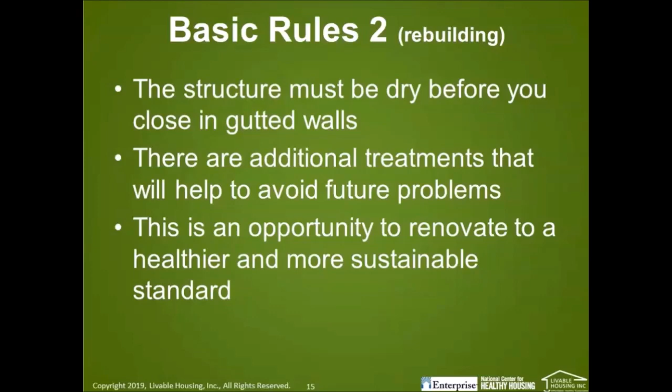Let's focus for a moment on the points in time when people could be exposed to health hazards as part of this cleanup process. First of all, when you first go back to inspect is a time when we have to be very careful. We'll talk about what precautions to take.

Disturbing anything in an environment where mold is growing really does complicate and expand the risks of mold, so it's very important that we have to be cautious about moving things around.

Certainly during the clean out of the building there are many health risks to be considered, and sadly, a lot of folks in our experience in a number of storms, beginning with Katrina, tend to return to their homes because they don't have other options, and they live in the building during cleanup and construction, and there are certainly risks there. During construction and living in the building post-construction, there are also potential risks, and we're going to go through all of these in detail.

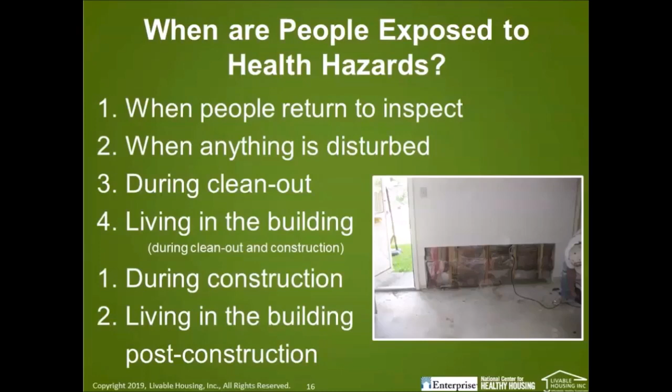Some of the hazards we're going to talk about are mold, whether it is active or inactive. There are risks involved. Bacteria, blackwater. Blackwater is a term used for stormwater with sewage in it.

Then there are standard housing hazards that may have been present previous to the storm, and they can be compounded by flooding and demolition, and those could be electrical hazards, structural hazards, and contaminants.

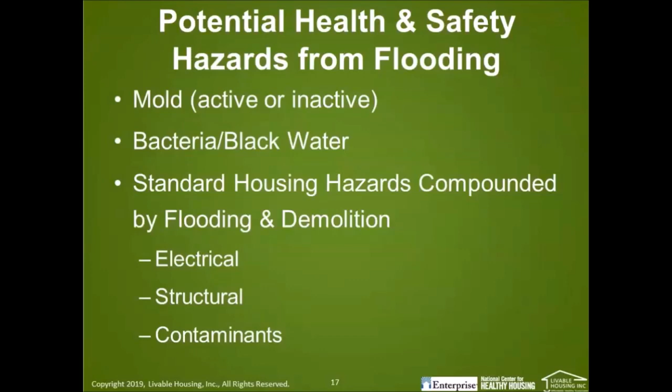We're going to talk specifically about the contaminants. Some of those include lead paint hazards, asbestos, and pests.

In terms of lead paint, moisture has the ability of making paint deteriorate dramatically and leaving behind lead paint residue. If it's lead paint, that's very dangerous. It also can expose asbestos risks in flooring and other materials.

Pests tend to nest in flooded properties. They're looking for shelter as anyone else would be, and so there's some risk there. Specifically, if in the process of the cleanup you end up doing demolition and exposing nests, in particular birds' nests, they can be very toxic and require strict adherence to personal hygiene and personal protection.

Folks, when they are doing cleanup, even when they first go back into the property to do an inspection and observe how much damage there is, really need to pay attention to personal hygiene and personal protection.

And there's always the risk of physical injury going through a building after any kind of storm. Structural, electrical, any number of hazards exist that may not have been there before.

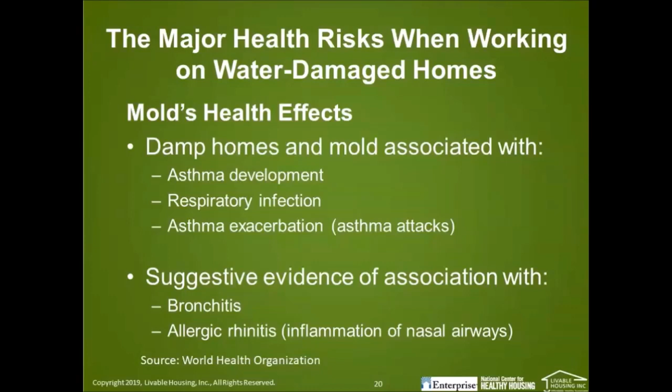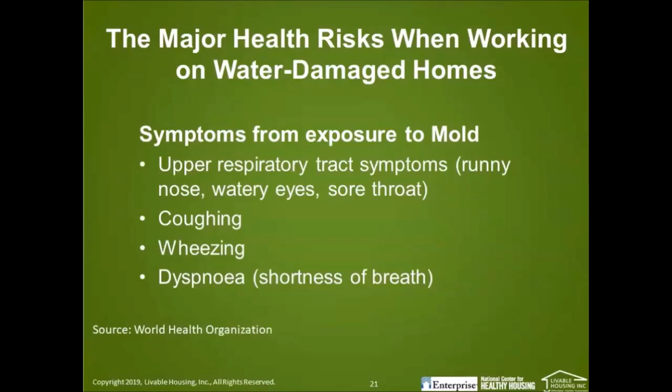We know that being exposed to mold can create all kinds of health issues, and they can develop over time with exposure. So even if you don't have health risks to start off with, you can develop sensitivities. Some symptoms you may see are upper respiratory tract symptoms: runny nose, watery eyes, sore throat. You may think this is just a cold, but you want to be very cautious and be aware of others working alongside you. Coughing, wheezing, shortness of breath—all of these can be symptoms of exposure to mold, and we shouldn't assume they're just work-related or from a common cold. So pay attention to those symptoms.

Other risks include lead dust. Lead dust is very difficult to pick out by sight—impossible, I would say. You won't see immediate symptoms typically, but symptoms can be seen, like headaches. And carbon monoxide—we want to be very careful. I mentioned generators before, but any kind of fuel burning equipment carries carbon monoxide risks with it. Car batteries, propane tanks, all kinds of things can create hazards. So those are things to pay attention to as well.

All right, so here's a little quiz. You can answer it yourself first, and then I'll tell you the answer. So, the most important factor influencing mold growth is moisture or water. I'm sure you would have guessed that.

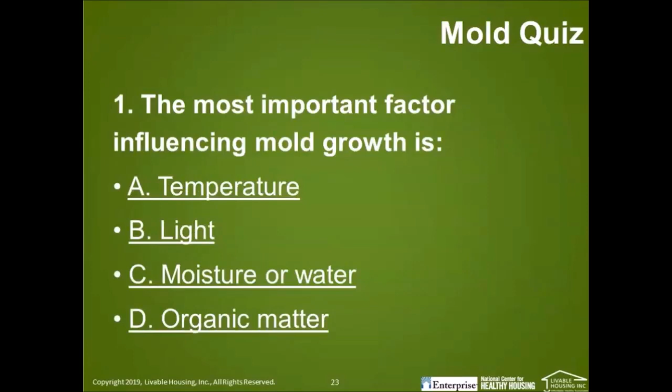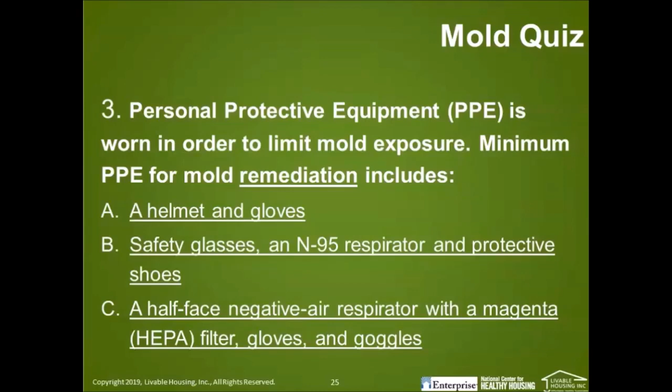Personal protective equipment, an acronym for it is PPE, is worn in order to limit mold exposure. Minimum PPE for mold remediation—and the word remediation here is important, that's doing the actual work—includes: A, a helmet and gloves; B, safety glasses, an N95 respirator and protective shoes; or C, a half-face negative air respirator with a magenta filter, gloves, and goggles. Should be no surprise we go with the most protective option, that's C, and we'll show you what all this equipment looks like in a bit.

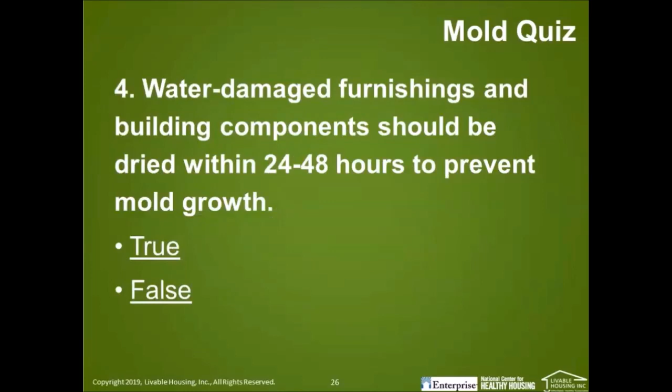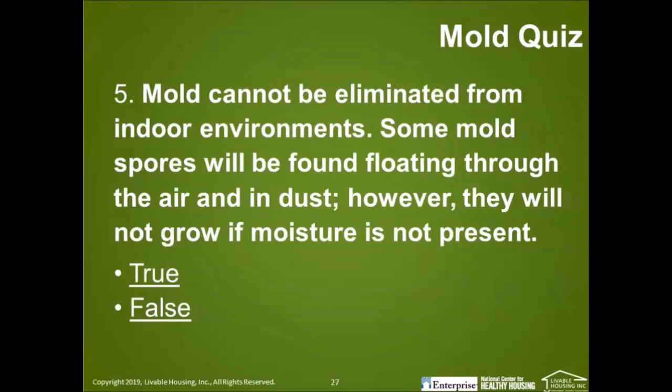Number five: mold cannot be eliminated from indoor environments. Some mold spores will be found floating around through the air and in dust. However, they will not grow if moisture is not present. True or false? And this is true. There are mold spores in every environment that we're in. So it's more of an issue of having environmental conditions where it can grow more readily and spread and create serious problems—and the health effects of mold exposure.

That was the end of the quiz. I hope everyone did well on that. I expect you did fine.

Health effects, again: allergic reactions, asthma attacks, effects from the toxins released by molds. Molds actually release toxins as they spread their spores. And the most vulnerable people, as was previously said, are young people, the elderly, people with respiratory problems, those who are immune compromised, and pregnant women. All the above are the most vulnerable portions of our population.

There are lots of different types of molds. This is Aspergillus, highly magnified. And this one even has its own website.

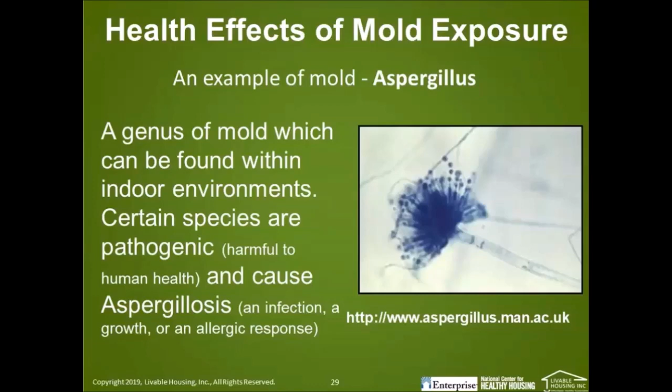There are some species much more harmful than others, and yet we don't really recommend taking the time when we have mold present to figure out which kind of mold it is. We think that all molds are generally dangerous, and we should treat them all with caution.

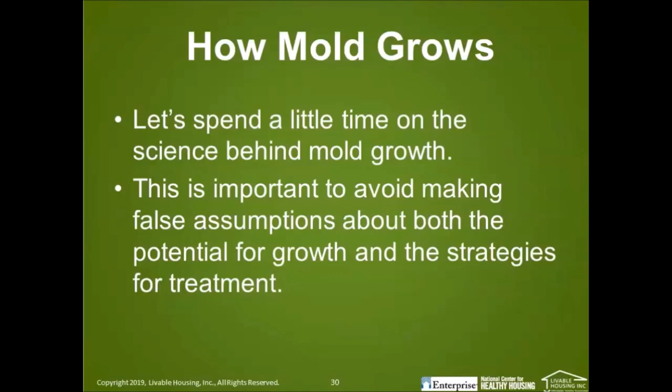Let's spend a little time on the science behind mold growth. This is important because we don't want to make false assumptions about the strategies for dealing with mold, the potential for growth, and the strategies for treatment. This is from an ASHRAE guide on mold. Mold spores have enzymes on their surface, and they break down damp organic matter as a food source. So any kind of organic matter can be a food source for mold.

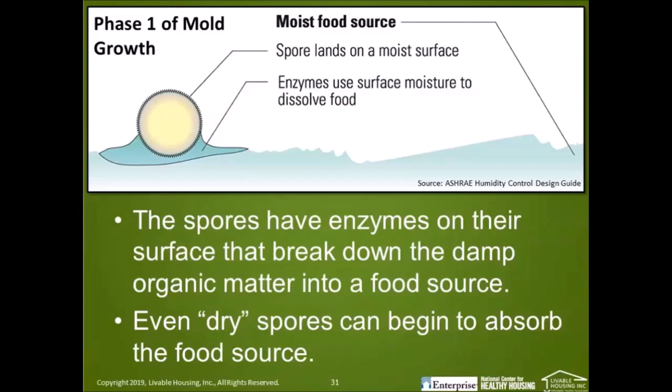Even dry spores, spores that have dried out in a dry environment, can begin to absorb the food source and, in a sense, rejuvenate themselves. As they begin to grow, they start producing filaments called hyphae that grow into the food source, allowing the spores to germinate. The hyphae also have enzymes that dissolve and absorb the food. This all tends to accelerate the process of mold growth. It's very microscopic, but this is what they're doing - it's a plant of sorts that is rooting on an organic material.

In phase 3 of the process, the hyphae start to grow more thickly. They grow deeply into the surface of the organic material, and they begin to form a protective mat that gives them a little protection from the environment. It also helps keep the surface moist so they can continue to feed, and they begin to even generate their own water, which helps digest more food.

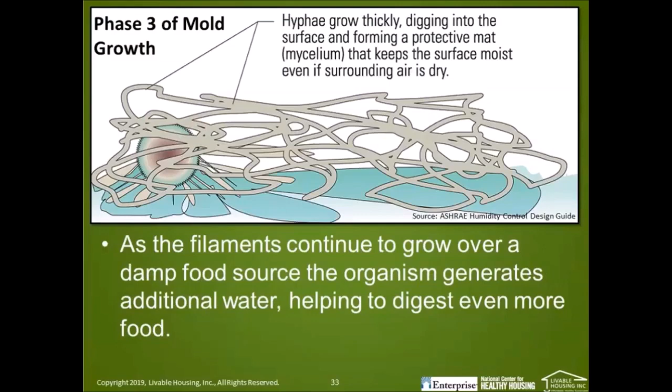Fascinating creatures. In phase 4, the mold grows spores and releases these spores into the air. When the food source runs out or the moisture goes away, mold growth slows or stops, but the spores are their way of reproducing, and then that begins the process over again.

Hope that's helpful. There are a couple other things to keep in mind - some technical terms here. Mycelium is the mass of mold. Mold spores can remain dormant for long periods of time until growing conditions are favorable. Fragments of mold, including the hyphae, can also be transplanted to grow new colonies. And it's the moisture on the surface of the food source that really gets things started.

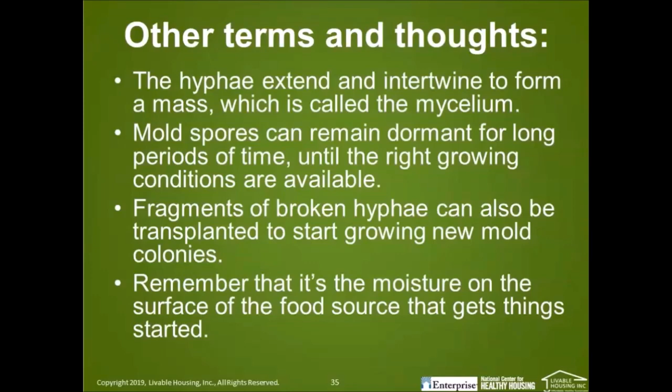What's interesting here is that dirt is even a food source. So even if a surface material is not organic, there could be dirt on it that would be sufficient as a food source for mold to grow.

So, Jonathan - Jonathan Wilson's going to take over and talk a little bit about his experience in New Orleans post-Katrina, and this is particularly important because it'll give you very good information about the risks of mold exposure during the cleanout process.

Thanks, Armand. I think that we have a benefit with mold in that there is a huge ew factor. That's important, because some of the contaminants we deal with, we can't smell them, we can't see them - something like radon, we tend to ignore it as a risk. When you go into a home that's been flooded and you see mold growing up the wall and you can smell it, there's a general sense that something is wrong here, and we need to be really cautious. That is a good thing.

That's really important for us to make sure people recognize they have to wear that protective gear Armand was talking about, and we'll talk further about what you should be doing to keep yourself safe. But even with that ooh factor, we sometimes overlook how serious this can be, and we'll say, oh, I can just run in for a couple minutes and I'll be fine. I don't need to put on this mask, or this suit that's warm or hot - I can do this safely, and it's not a big deal.

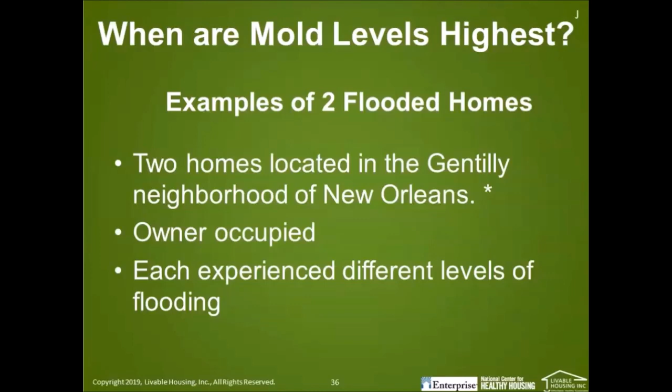The first is a two-story home. It was built relatively new - only about 20 years old when Katrina hit. Slab-on-grade construction, and this was the one that was raised a little bit.

So it had about 2 to 3 feet of mold growth on the first floor. It had only about a foot of water on that first floor that generated that 2 to 3 feet of mold. The second home was in a lower part of the neighborhood, a 1-story home. It was older, built on piers, and it had at least 5 feet of flooding, and the mold growth, when we got into this property, was all over the ceiling.

It was all over everything. It was a place that you had to have full protective gear just to feel like you could breathe safely in this property.

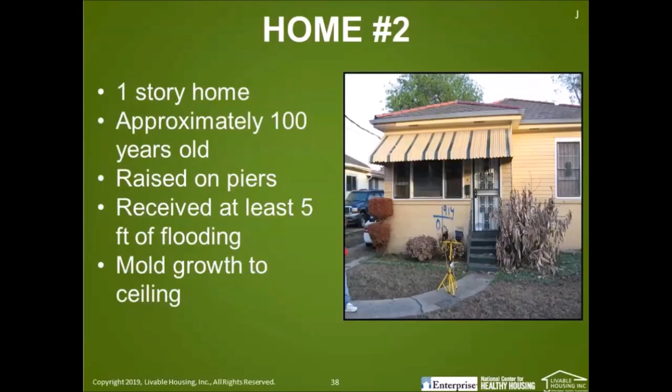So what did our mold sampling results tell us? So if the part of our brain that has the ooh factor is telling us this is a problem, looking at these results really sets it forth.

So what do we know about colony-forming units? Number one, nobody has created a health standard for this. So you can't go to the CDC or the World Health Organization and find out what is a safe level of mold that I should be in. That has not been created.

But we have some averages. The average for an interior property is less than 1,000 colony-forming units per cubic meter. On the outside, in a community like New Orleans that tends to be humid and tends to have a lot of vegetative growth around there, it tends to be in the 5,000 to 10,000 range on the outside during the warm, humid season. So that's giving you a baseline on what people are normally exposed to.

So here we have a living room where you'd normally expect it to be less than 1,000, and we're over 1 million colony-forming units during the possession removal process when we're pulling stuff out of the property. After we've allowed it to settle down and people haven't been in that property, it's dropped down to 35,000, but it's still way above what we normally expect.

And then when we were doing demolition, so we've gotten all those possessions that have been sopped with water and have mold all over the unit, they're out of there, but we still have mold on plaster, on some places where we had drywall, and the wood studs behind the walls are still coated with mold. During that process of pulling out the broken plaster, the lath, and cleaning up, we're at almost 600,000.

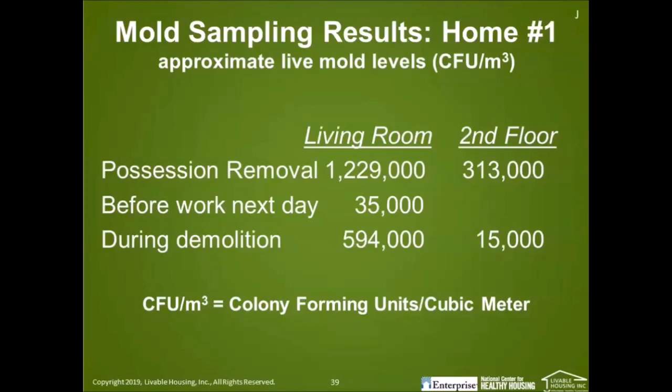Looking at that second house, this is the one that had mold up to the ceiling. When nobody's been in it, and again there's been no disturbance, we're seeing levels that are well above. The first time when it's been closed up, it's higher. When we've been able to open up the windows and allow for a little bit of movement, it's a little bit drier in there. We're seeing lower levels, but levels that are still well above 10,000 on the inside.

And then it jumps off the roof when we start doing demolition. Well over 6 million colony-forming units per cubic meter in that living area.

And this is where, while we're pulling stuff out to the street, we'd be expecting to see maybe 10,000 to 15,000 on the outside of the property. But while we're doing this, moving all this debris to the outside and creating piles, and there's piles at the neighboring houses, we're seeing over 30,000 colony-forming units just on the outside of the property where you'd think it would be relatively safe. So we're creating an unsafe space inside the house that's magnitudes above where we'd expect it to be, and even on the outside we've got real problems.

So when you're doing this, you need to be wearing your protective gear. It's clearly needed on the inside, but also on the outside, because we may be creating a real hazard, both interior and exterior. So hopefully this gets beyond that ew factor, that there's numbers behind it to say we need to be really safe, that we need to be wearing our protective gear when we're doing this work.

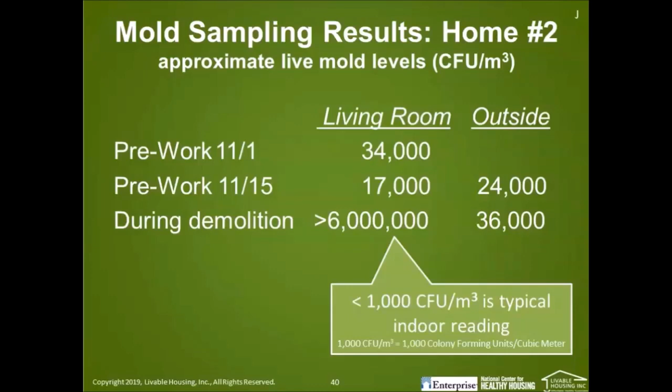So let's talk a little bit about the concepts of personal hygiene here. It's really important to be able to wash your hands when you take breaks. You want to make sure you have clean break areas. Protective clothing can spread all of the bad stuff that you run into in a home that's been flooded, or a home that has mold growth or other contaminants. And so a lot of people will not pay sufficient attention to that.

I'm going to now go through and talk a bit about the information out of the field guide that the National Center created. You can easily find that on the National Center's website, and it will have links also in the resources end of this presentation that you'll be able to get via download.

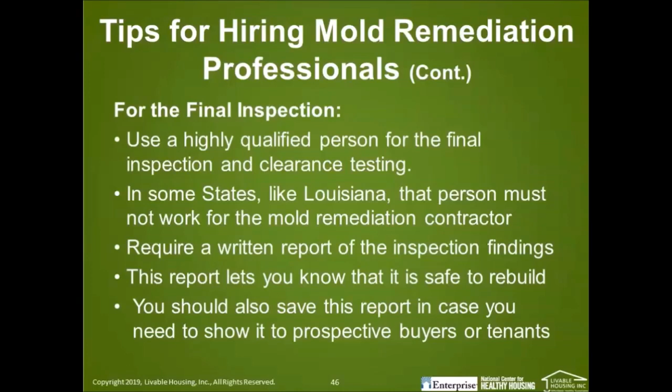There are 2 agencies that do certify mold professionals, and again, this will be on the PDF file of the slides so you can get access to these websites and the names of these agencies later.

There are other professionals that you may need if there's asbestos in the property - again, an incredibly high-risk contaminant. And in some states, there are contractors who apply borate solutions. In some states you need to be a licensed pest control operator to apply some of the solutions we're going to talk about, even some of the more benign ones, but we'll talk more about them in a bit.

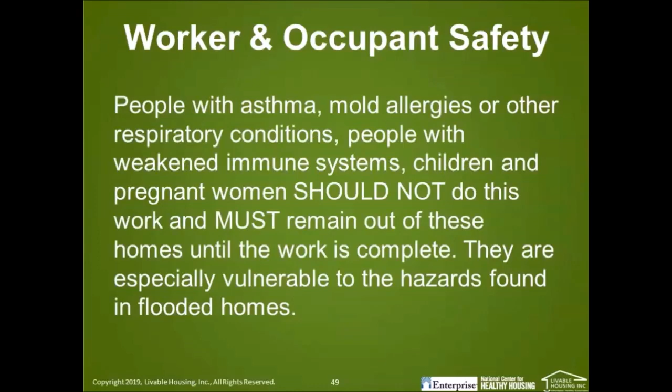And when it comes to worker and occupant safety, we're harping on this, but it's crucial. People with asthma, mold allergies, or other respiratory conditions, people with weakened immune systems, children and pregnant women should not do this kind of work and really should be out of these homes until work is complete. So, word of caution: we definitely want folks to wear a respirator.

Respirator use is extremely important, and we'll reiterate that again. But not everybody's respiratory system is up to the task of doing this kind of work, or even wearing a respirator. If you know you have respiratory issues, you should get your doctor to tell you it's okay. It is really best to have a respirator fitted to you to make sure it will do its job properly. OSHA regulations require this for contractors, and it's good guidance for anyone doing this kind of work.

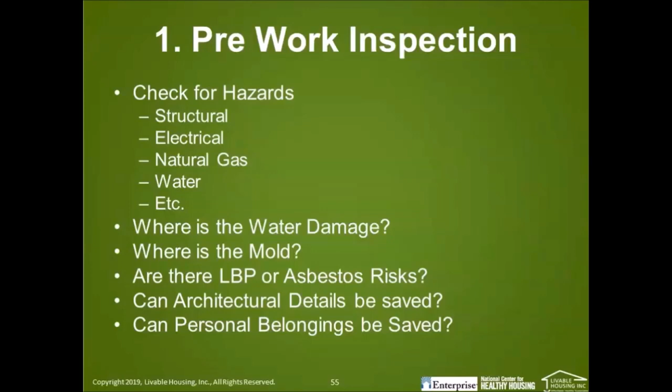Start thinking about things you think you can save and detail them - maybe architectural details worth saving, or materials that are salvageable. Some wood details can be saved; typically drywall and fibrous materials are not. Are there personal belongings you may be able to save? This is all part of the pre-work inspection - starting to document and categorize things you're going to try to save or dispose of.

And before work begins, you want to make sure you've got supplies and a plan ahead for trash removal. Oftentimes debris can be stored at the curb.

We recommend putting signage up to let people know that there's hazards there. The last thing we want is for debris at the curb to be a hazard for children in the neighborhood. You want to set up a separate storage area for items that you're going to save. You want to get them out of the work area so they don't become any more contaminated.

If you need temporary electricity, you need to set that up at this stage. If you're going to have tools on site, you may want to set up secure storage for them. Certainly turn off gas and electric services if there's still risks. And then there's the issue of bathroom access. If you don't think of that at first, at some point that'll occur to you. But these are all things to think about ahead of time. You don't want to start work without having thought about them.

We're going to talk here for a minute about basements. In Katrina, there were no basements to deal with. Certainly post-Sandy, we dealt with many basements in New Jersey and New York, so it's a mix of situations. But basements present some very unique issues and risks.

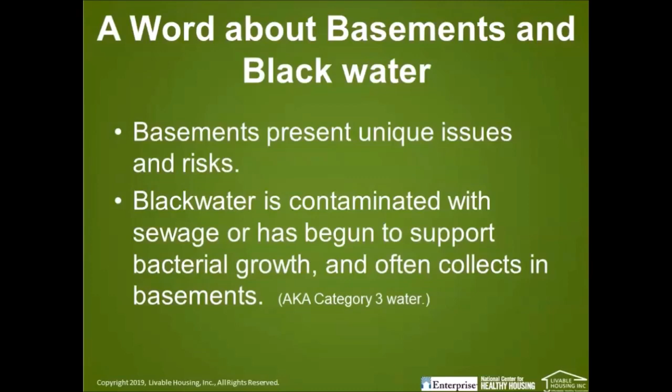When we're dealing with Blackwater, and especially water in basements, you're going to need waders of some sort and respiratory protection. You don't want to be wading in this water and allowing the water to get to your skin.

Pumping out basements is sometimes necessary, and the gas that's in Blackwater, the sewage that's in Blackwater, produces methane gas, which is an extreme hazard. So we want to get the water out. We have to be very careful when we're doing that, and eventually when we get the water level down, there's going to be solid debris remaining that we're going to need to shovel out.

Blackwater in basements, we're going to talk in more detail about cleanup, but in basements this involves scrubbing down walls, and if you have working floor drains, that's great. You may not. This is a soap and water process at first, and we'll talk more about other treatments. Laundry or dishwashing detergent actually works great, and mild bleach solutions can be an option here as well. But we don't wholesale recommend bleach because it is not as effective as some people give it credit for, and it also presents other hazards and damages materials. Soap and water is an excellent cleaning medium, and that's what we recommend.

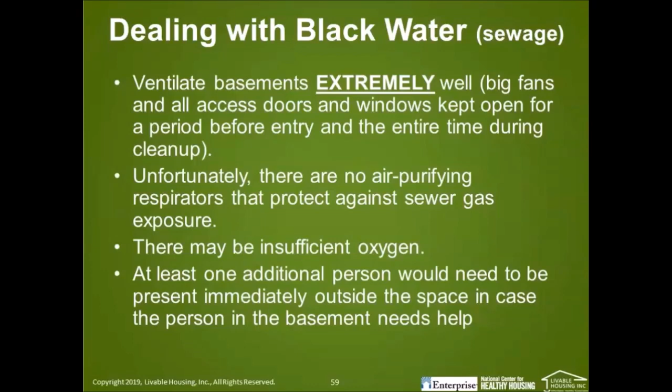So we always really strongly recommend that this is not a task for an individual to take on. You need multiple people on site, some of which are just watching out for the person that's in the basement. Serious risks here to be dealt with.

Typically in rain situations, having good stormwater management minimizes the saturation level of the ground and doesn't really affect the water table. But in a flooded situation where the water level has risen partway up the basement or even past it into the first floor, the water table could be saturated all around the building, and removing basement floodwater too quickly can create an amazing hazard, in that the pressure of the water in the water table can actually push in the basement foundation walls.

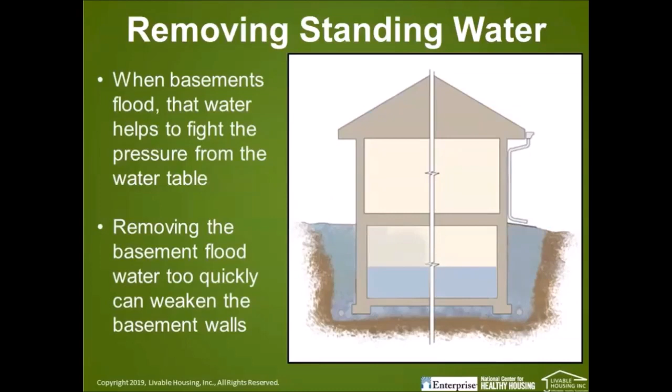So FEMA has excellent recommendations about this. We need to be very cautious and strategic about removing water out of basements. FEMA's recommendations say when flood waters have receded such that they're no longer covering the ground outside, pump 2 to 3 feet of water out of the basement, mark where the water level is, and wait overnight. Then check the water level the next day. If the water level went back up, it means that the water table is still very high and water is still seeping into the basement, and it's too early to completely drain the basement.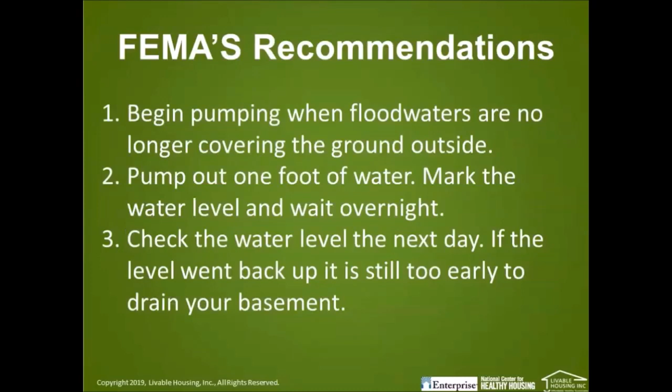If you've done that and the water level has gone back up, wait 24 hours, pump the water down a foot again, then check and repeat until the water in the basement stops returning to your mark. At that point, pump out 2 or 3 feet and wait overnight to see what happens. Just follow that protocol.

Be very cautious about trying to pump all the water out of the basement at once, because the last thing you want is to have basement walls collapse or create structural problems that are going to make the repair very, very expensive, if possible at all.

We talk about this at this stage because we need you to be thinking about removal of standing water in the basement as you're strategizing about the rest of the work. You may be able to do some clean out before completely pumping out the basement, if the building is structurally okay.

There is a website where FEMA goes into great detail about this, and again, you'll have this in your copy of the slides. All right, so now let's get back to the process.

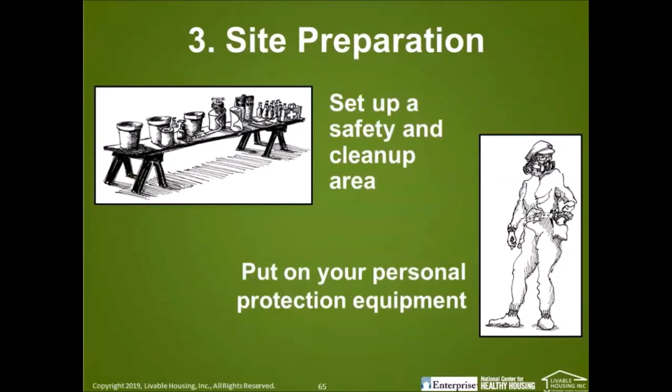Site preparation involves setting up a safety and cleanup area and also personal protective equipment. One of the things we strongly believe in is separating the work areas, those affected by flooding, from those that have not been.

For instance, if the basement was flooded but the first floor wasn't, having clear separation between those areas is important. Similarly, if the first floor was flooded and there's a second floor, you would want to seal off the second floor from the first floor to minimize the spread of contaminants.

There are things like plastic sheeted doorway coverings you can create. In this case, there's a sheet of plastic with a slit and a flap over top of it to protect the opening, so that as you go from clean areas to work areas, you're spreading fewer contaminants.

We always say set up a things-to-be-saved table outside the work area, or an area to save things, and consider putting plywood down or some kind of sheet material to walk on as you're removing furniture, cabinetry, and upholstered items out of the building.

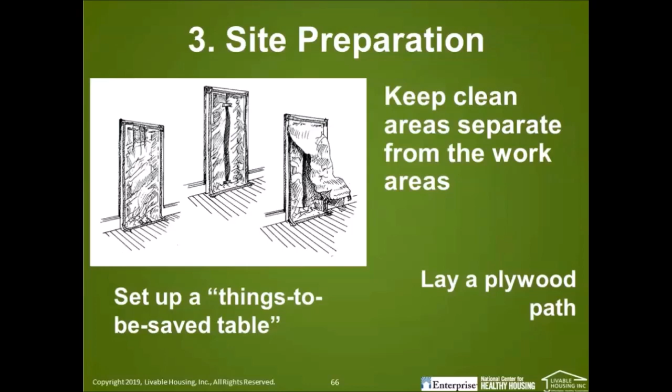Going over soggy carpeting can be very hazardous. Think about the surfaces you're walking on.

We also want you to think very much about ventilation. It's always important to try to dry out the building immediately, but we don't want to create a ventilation strategy that spreads contaminants from the work area into areas that weren't heavily affected. Sealing off those areas and ventilating the work area properly is key.

Here's a strategy where the first floor was affected, so there's a window fan ventilating the first floor. You might think putting a fan up on the second floor would make sense, but no, we would strongly recommend sealing off the connection between the floors and ventilating directly from the work area.

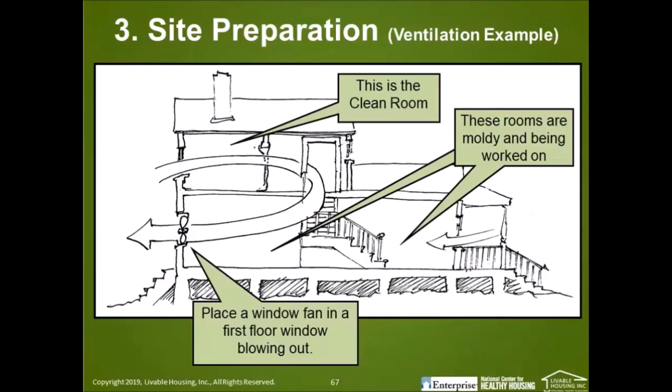So during the clean out, we're going to ventilate. Now we're at the clean out stage, we're actually starting to work. We want to ventilate as much as we can, remove small furniture and objects on the floor first to create clear pathways, then move on to removing large furniture, followed by appliances like refrigerators and stoves that have been affected.

Cut and remove wall-to-wall carpeting, cutting it into manageable sections rather than dragging out a big piece. Cut strips, roll them up, bag them, and take them out to the curb. Clean out all your closets, shelves, storage areas, and kitchen cabinets. We need to get into every nook and cranny in the work area to expose all the potential areas where mold could be growing or where contaminants may have spread.

It's very important to be methodical here, going in this pattern of starting with small stuff, large stuff, appliances, flooring is the safest way to go.

There are some historic details you may want to save that may be higher quality. Saving those is good. If you can get them out at this stage and store them someplace safe, that would be great. But it's often much less expensive to dispose of building components that are moldy, and certainly any drywall, plaster materials, carpeting that's become moldy, that stuff needs to go. There is a section about selective tear out in this clean out guide called Section 7, which is worth taking a look at. But if we're gutting and tearing out materials, we want to be thinking about what can we save, what do we need to store, and what is just going to be debris.

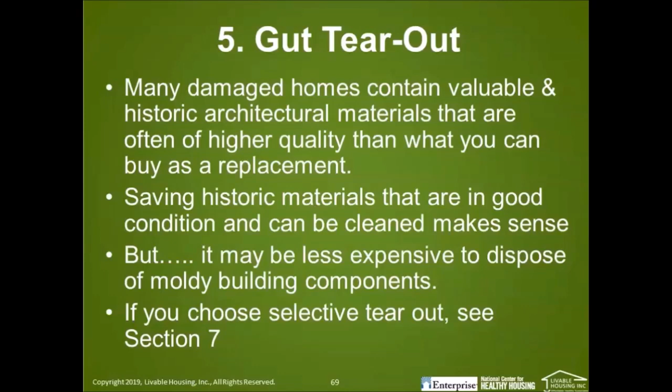Any cabinets, shelves, doors, trim that has been damaged beyond repair, this is the time to remove them during the process, and then tearing down drywall or plaster ceilings that have been affected, removing drywall and plaster from the walls would be the next steps. You'll notice that we have the ceilings first before the walls. The idea here is we're working from the top down.

You'll notice in this illustration, this person is working from a ladder. It's very important, if you're on a ladder, not to be pulling materials onto you. So this is a stage when you're first getting started. It's difficult to do, but you need to be cautious that you're not going to pull a ceiling down on top of you as you go.

So you'll see they've started cleaning out an area, and now they're using pry bars or tools to lever off other materials. It's extremely important, if you're going to create debris from a process like this, to create a pile, move it out, and then move on. Do not do the entire ceiling in a room and then try to remove the debris. It's way too dangerous. Work in stages. That also gives you a little break to be outside.

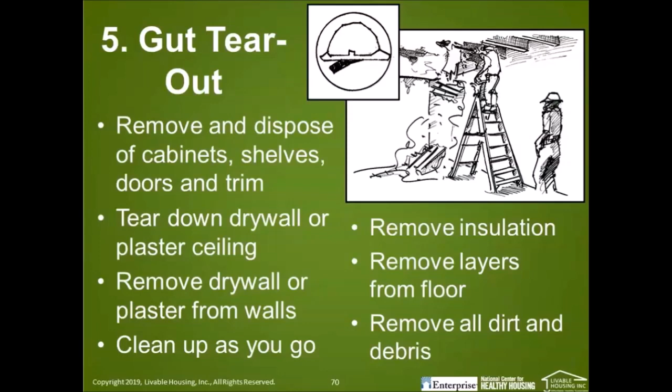So let's say we are now at the stage where we've cleaned out all the materials that have been affected. I will say at this point there are some folks that suggest that you can get away at times by removing only the bottom 4 feet of a wall covering. That may or may not be true. We have seen plenty of situations where people have done that, left the upper portion of the wall intact, and had mold grow inside that wall cavity above there.

You'll see in this illustration the entire wall has been gutted. It does make it a lot easier to clean, and it is a better way of ensuring that you're addressing all the potential mold growth and contamination. It's something to consider. I think sometimes it's penny wise and pound foolish to go part way up the wall, although some insurance companies will suggest that. I don't think it's that much more expensive to do the whole wall.

In any case, when we're done gutting, then we want to go to this phase where we're doing pre-construction and cleaning. This phase is very important because this is where our work will help to ensure that we're not creating an unhealthy situation in the long term.

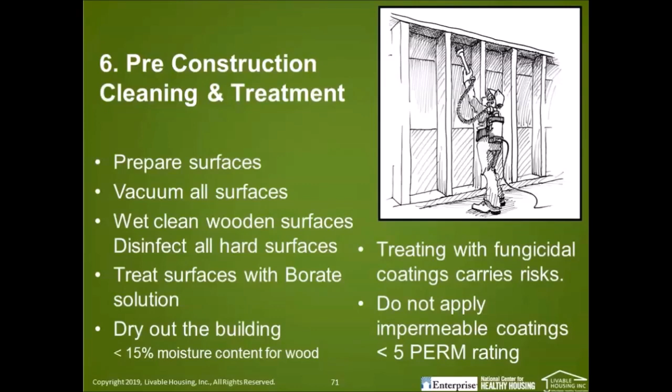Sometimes during this pre-construction cleaning and treatment time, we may need to run dehumidifiers in hot, humid climates. Commercial dehumidifiers and other restoration industry equipment can speed this up. There are also air scrubbers that help create more circulation of air. If commercial equipment is not an option, Louisiana State University, who has great resources about this, recommends combining running of air conditioning and electric heat at the same time to help dehumidify and clear out the air. Their website has some great detail about this methodology. We're going to give you a resource connection to that as well.

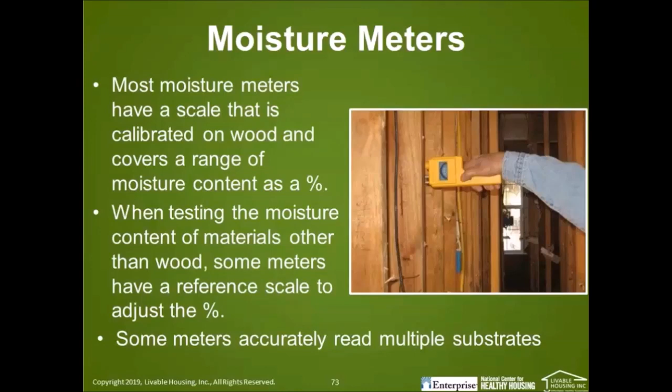This is an illustration of a moisture meter, and we think these are really important to use to make sure that all the wooden materials exposed after a flood dry to less than 15% moisture content before we re-drywall, before we close in these walls. These don't have to be terribly expensive things, but as you can imagine, if you close in a wall prematurely, you can create all kinds of problems with mold growth behind the new clean, shiny drywall finish.

A word about HEPA vacuums. They could be expensive. You could try to rent a HEPA vacuum for the vacuuming portion of the cleanup process. Some of the shop vac style wet dry vacs have accessory HEPA filters. They're not truly HEPA filters, but that might be some sort of compromise. In any case, being cautious about this is very important.

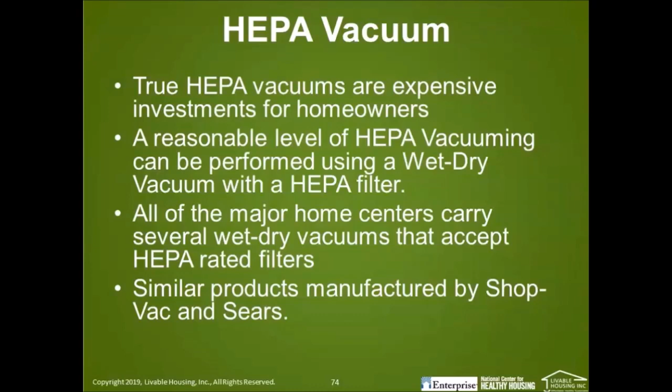Let's talk about wet cleaning. Again, we don't really recommend bleach except for hard surfaces, as I mentioned before. A non-phosphate detergent - the Center for Disease Control recommends using laundry detergent or dishwashing detergent. And this 1 cup of household bleach per 1 gallon of water is important to remember for those hard surfaces. You don't need anything stronger than that. You should not use straight household bleach. Household bleach is sufficient - you don't need to have a concentration greater than 1 cup of household bleach with a gallon of water.

If you're mopping and cleaning, we strongly suggest using a multiple bucket system where you have a constant clean rinse water bucket to rinse out your mop and then wring it out before you use it again. So having separate buckets for soapy water, clean rinse water that you change regularly, and then a third bucket with a wringer to wring out the mop is the best way to go. If you don't have the 3-bucket system, you just end up spreading contaminated water around - that's not what you want to do. The idea is: use soapy water on the mop, mop up an area, rinse it out in clean water, wring it out in the wringer bucket, and then go back to the soapy water and mop again. And that means you have to change the water in the rinse bucket very regularly. Very important methodology.

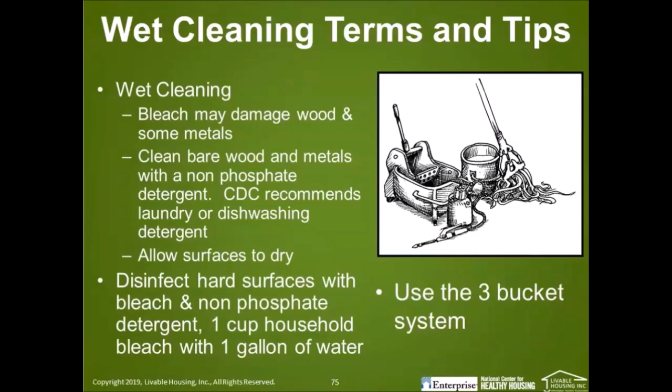So with that, those are the really key steps. When we talk about the chemicals we're using in our homes, we need to recognize that many of them, especially the disinfectants we're using, are regulated chemicals under the EPA. That's meant to protect us from many bad things in our environment. So recognize that this is both something to look out for, but also something that you can use to protect yourself.

Somebody may be selling you something that says, oh, this will take care of your mold. Well, if they're selling it to you as a cleaner, it's not going to be covered by EPA. But if it's being sold to you as a disinfectant, then you should be able to see a label that says it's EPA certified as a disinfectant. It's important to look for that.

In addition, you want to make sure you're reading the safety data sheets that are required whenever there's a regulated chemical, so you know what you're using. Again, be careful that if it does have bleach in it, you're not mixing it with something else—there may be other chemicals there, so it's useful to see what reactions may come from it. We've already been discouraging people with respiratory issues from doing this work, but especially if you see that a chemical has a high respiratory toxic level, you want to be especially careful about those chemicals.

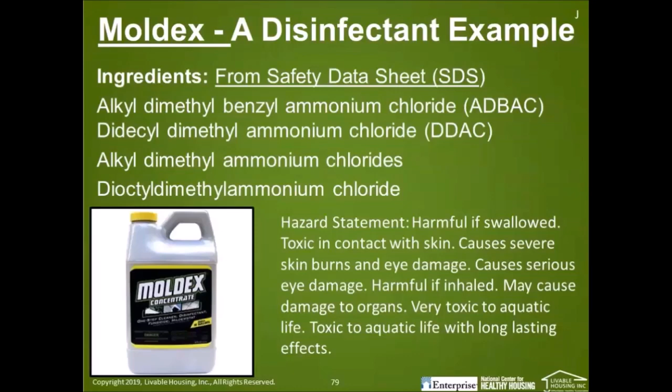it means be careful. And once you get past that clean and disinfect stage, there are some optional extra things that we think can be useful. This step is definitely something we put as a higher priority option that you should think about. So once you've cleaned and disinfected, there is still a risk that if it's not totally dry when you close up the wall, things could come back, the mold spores could come back.

And so borates are a chemical that can soak into wood and have a biocidal property that will deter not only mold from regrowing, but it actually deters termites from eating that product. If there's a little bit left on the ground when you spray it onto your wood studs, you may actually deter cockroaches that may be running around within your wall space. So borates have a biocidal nature that is good to prevent many bad things from coming back in your house.

So there are many products out there. There are some that are in powder form, we're showing this now, the Tim-bor. There are some that are in a liquid form called Bora-Care that have a glycol in them that helps it absorb into the wood. And then there are some that not only have the borates in them, but actually also have some quats in them, so it's not only being a preventive measure, but can actually be an extra mold killer at the same time.

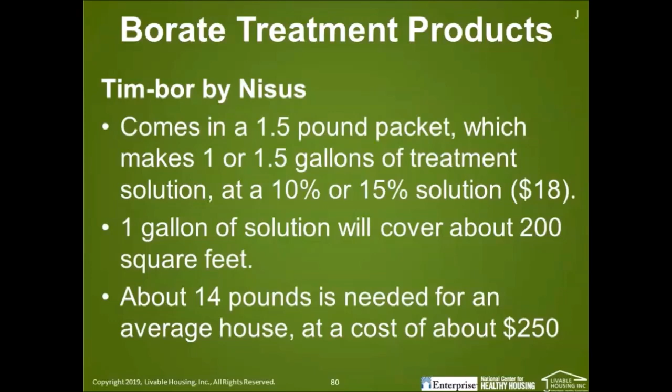And you can see how this is done. You mix it with the powder and water. You spray it onto your studs, onto any cavity that you're going to close up, and then you let it dry, and it becomes a preventive measure for the future.

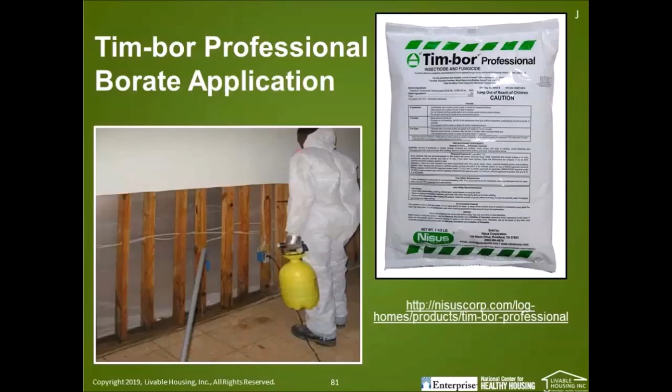Again, we don't want to emphasize this too much, but this is just some details about where you can get this information and look at, and as I mentioned, there are different levels that are open to people.

So to emphasize: clean, then dry, make sure it's down to a level that's appropriate, and then apply these products that will be beneficial for prevention in the long run, and make sure you're following the instructions.

The EPA is regulated and it's for a reason. People have used these inappropriately. Follow the instructions. That's part of the regulation process to make sure that the instructions are clear and that you're doing it appropriately. It's not a product where you say, oh, if I double the amount I'm putting on, it's going to be better. It may actually not work as well. So you want to use the allowance that is put into the instructions.

Ultimately, cleaning and drying are the most important. This is an extra step, extra protection at a minimal cost.

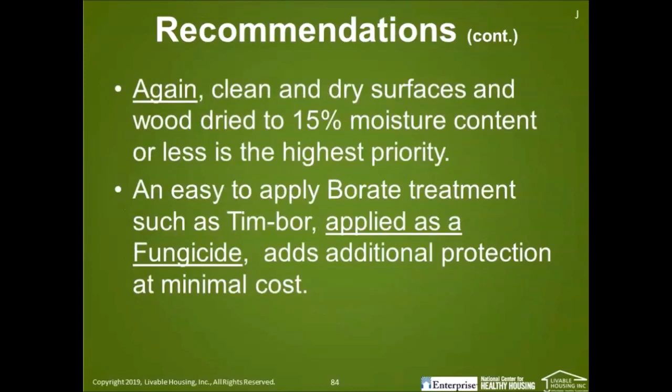One other thing that some people talk about is using a coating. We don't encourage people to use this except, one, if you have somebody in your house that is highly sensitive to mold, and two, if you've got a room or an area that is likely to be flooded a lot, and in that case, then you want to have this extra protection.

So I think that's the product chemical portion of this. I'm going to turn it back to Armand to bring us home.

Thanks, Jonathan. Great job. I like the fact that the borate powders can be mixed in a typical pump sprayer that most folks have around and can be applied. I think there's so many benefits to being able to apply those borates, and that extra level of protection has quite a bit of value, and I like the fact that it's a pretty straightforward application.

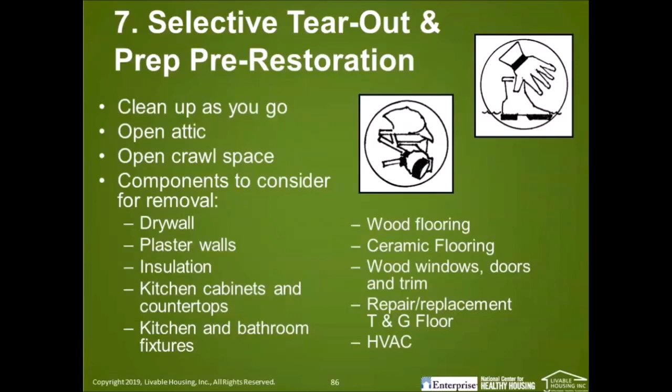With HVAC equipment — heating, ventilation, air conditioning equipment — we have other things to consider, especially with ductwork. If ductwork has been underwater, oftentimes the best thing to do is to remove it.

Possessions — sometimes wood furnishings, wood tables and chairs, might be repairable. Clothing, drapery, and other cloth, it's a depends thing. It depends on how quickly you can get in, get things cleaned, get things out, and get them cleaned.

Things that are washable, like china, glass, jewelry, porcelain, metal, if they haven't been severely corroded by contaminants, they may be cleanable. Electric appliances are tough.

If electric appliances have been under flood water, they are rarely worth keeping. It doesn't make sense typically to hold on to those.

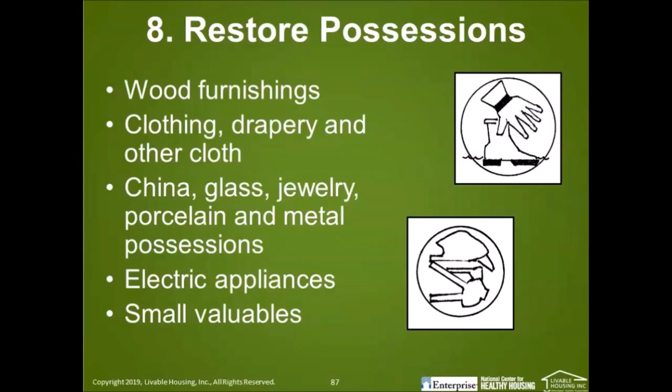Knickknacks, valuables - you'll have to decide what's keepable and what isn't. Generally it has to do with the construction of the material and whether or not it has absorbed contaminants, or whether or not you are able to clean it.

We would like to talk now a little bit about this idea of rebuilding with resiliency and sustainability in mind. Resiliency, of course, being a feature, a classification of materials.

An ability for a material to withstand things like flooding or other events and come back and still be usable.

So longer life - things that have longer life cycles, things that are resistant to moisture damage, things that contain fewer contaminants to start with, that are easily cleanable and require less maintenance.

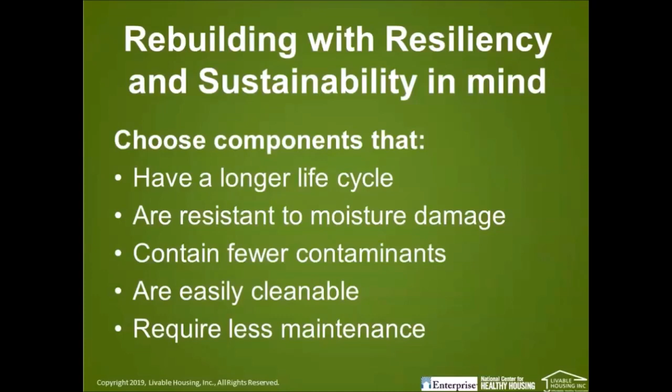We have the opportunity to make choices for components that we're replacing that fit these descriptors better than what you may have had previously. Something to consider, certainly.

Other things to consider - you may have opened up exterior walls that hadn't previously been insulated. Now may be an opportunity to add insulation, which might be very useful. We'll talk a little more specifically about that.

I'm going to talk about air sealing, a very good thing to do for all kinds of reasons.

Certainly we recommend the use of products that have low levels of VOCs, that's volatile organic compounds. Some paints, some floor coverings, some cabinetry have high VOC levels.

We know we want to avoid formaldehyde in products as much as we can, but this is an opportunity to think about the VOC levels in products.

It's an opportunity to increase ventilation, especially ventilation in bathrooms and kitchens, which can have a big impact on health, but also possibly whole house ventilation.

And then there's also the opportunity to upgrade equipment - HVAC systems, hot water, domestic hot water systems. If they are damaged or destroyed, oftentimes upgrading is not that much more expensive and at least worth pricing out.

And we always recommend the use of better finishes, coatings, especially in high-use areas. So better quality paints, possibly paints with a little bit of sheen to the finish in bathrooms and kitchens so that they're more cleanable.

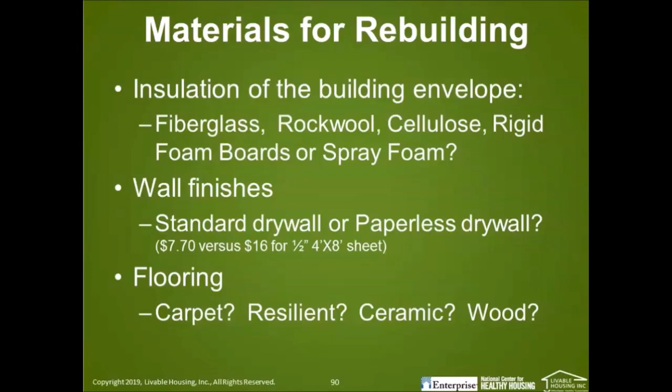A lot of people in flood-prone areas are getting way away from carpet use and going for other surfaces. And there are health reasons to avoid carpet - it's very difficult to keep clean in the long run, even without a flood.

Let's talk for a moment about air sealing. While you have the structure open, sealing up all the potential areas for air leaks is a really good idea.

This applies in climates where you're subject to cold temperatures in the winter, or climates where you're subject to hot temperatures in the summer, or perhaps you're in a climate that does both.

Air leaks waste energy dramatically.

They tend to sometimes actually increase contaminant infiltration, depending on where the replacement air is coming from when the air leaks out.

More in cold climates, when we're heating air in the winter, that warm air tries to find a way to escape because it's lighter - it tries to go to the top of the building. If there are air leak spots at the ceiling, it will escape there. This is called the stack effect.

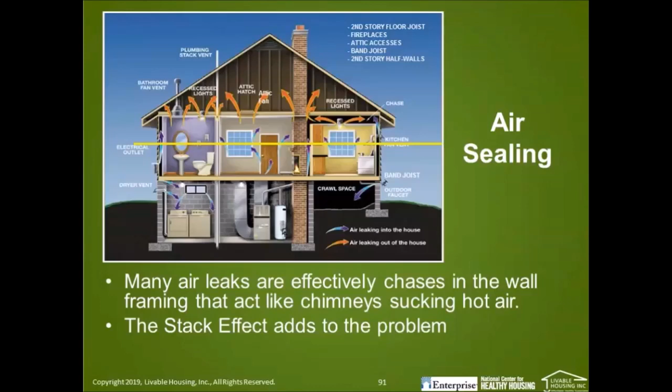And it's a dramatic effect, and this is an opportunity to do some air sealing. There's lots of reasons to consider air sealing. I think there are at least 7.

Air leaks waste energy. They create drafts, which are a comfort issue. They actually make spaces less comfortable at the same indoor air temperature if it's drafty. And people sometimes will crank up the thermostat as a result and waste even more energy.

Air sealing reduces the risk of fire spreading quickly. It's actually a building code requirement in new construction. It's a good thing to do in a gut rehab for fire-stopping reasons.

Air leaks can transport moisture at high levels in some situations. Pests love to use those same pathways that air does to move around the house freely. Air leaks that are sealed help resist pest entry from the beginning, and this is called integrated pest management, or IPM. It's a great thing to do, and there's no chemicals involved in this.

Air leaks also can carry other contaminants from garages, attics, crawl spaces into the living space, which we may not want. And it's a very inexpensive thing to do. It's just caulks and in some cases use of spray foam sometimes in small amounts to seal up gaps.

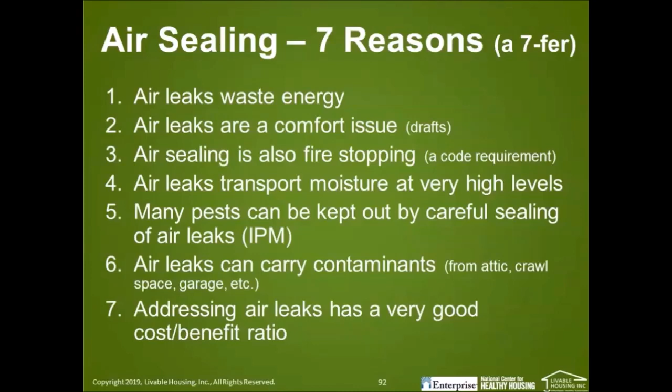Typical examples: plumbing chases, holes drilled for electrical cables, wall penetrations for electrical boxes, space around ductwork and flues. All of these are spots where we may want to do air sealing, and it can have a big impact on both energy usage and pest movement within a home.

Here's a couple quick examples. This is a nozzle of a spray foam gun, placing a small amount of spray foam around a penetration in a crawl space or a basement where wires are going up through the ceiling. You can also see spray foam around the pipes in this photo.

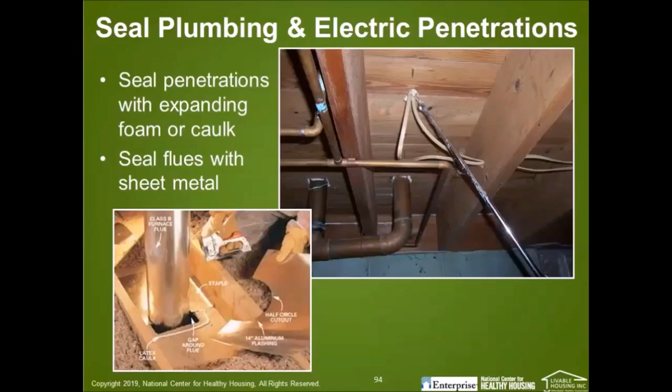In this case, because it's a flue for a combustion appliance, you have to keep flammable materials away from it, so they're using sheet metal, just aluminum flashing here, to air seal around the flue at the attic level to resist air movement around in that space. Simple things to do, not that complex.

Good things to consider. The insulation that we typically install in homes, think now moving to the concept of insulation, is batt insulation. Most folks are familiar with fiberglass batts. It takes more time or costs more to do well if you're hiring someone to do it, but installing batt

insulation correctly is very important. It has a big impact on the effectiveness of the insulation. You can get a 40 to 60% improvement if it's done properly versus improperly.

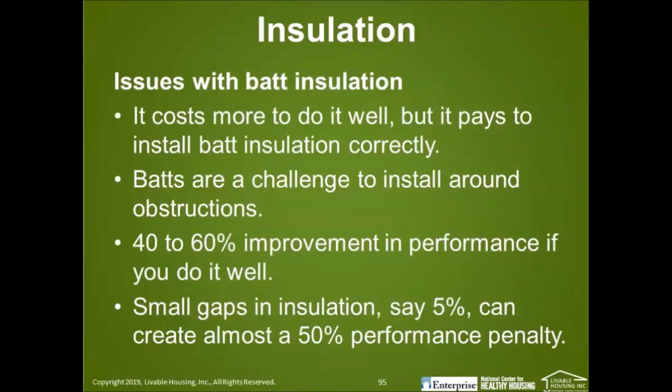And that can be a little bit of a challenge to install around obstructions like wires, pipes, electrical boxes within wall cavities, but it's worth installing batt insulation well, taking the time to do it well.

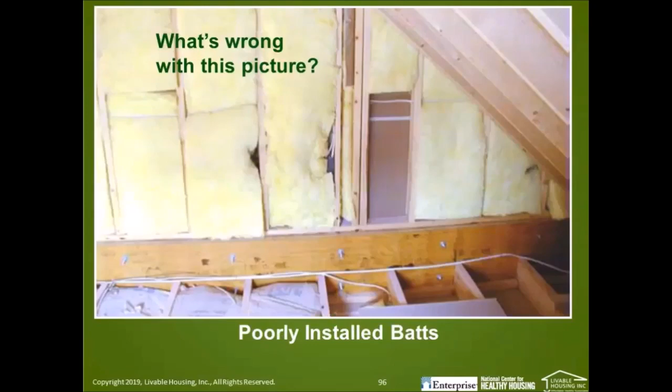Insulating attics, this might be a good time to insulate your attic or increase the insulation in your attic. Cellulose is typically the least expensive way to go, although you can also blow fiberglass fibers into attics for insulation, and they both work very well as insulation materials.

Cellulose is recycled product. It's relatively pest-proof because there are borates built into the insulation, into the cellulose. Jonathan spoke about borates before, relatively safe chemical, but also helps resist some pests. And it's fairly simple to do. It's fairly easy to find contractors to do it, and some people are capable of this as a DIY project.

Spray foam is always an option. It is quite a bit more expensive, and this requires professional installation by trained people with a significant amount of personal protective equipment on, because the chemicals here are caustic while the foam is curing. Typically, this is beyond the budget.

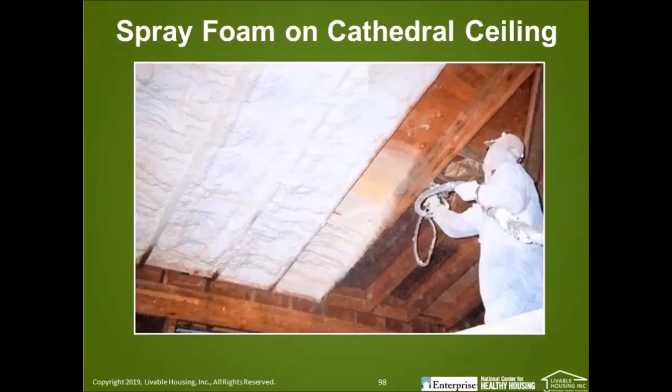There are two types of spray foam I'll just mention very briefly. Open cell, which is less expensive, doesn't have as high an R value as closed cell. They're both good at noise reduction. They're both decent insulators, although the closed cell has a higher R value per inch, and closed cell is moisture impermeable. That has there are applications where that would be a better choice. I don't want to get into the weeds too much about that, but it is good to know the difference.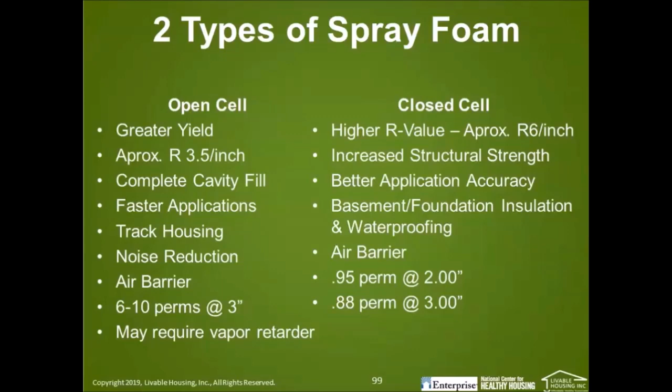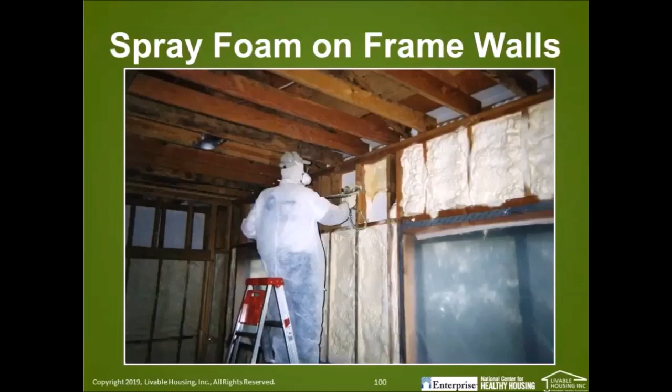Here's another example of spray foam insulation being installed in a wall cavity. Makes a very good insulation. Again, it can be quite a bit more expensive than some of the other options.

Another option is to spray either cellulose or fiberglass into wall cavities rather than installing batts. They mix a little moisture into the fibers at the point they're spraying them in the wall, and they essentially stick into the wall, and then they brush the material flush with the face of the studs so that when you go back with a wall finish, there's no interference of the insulation. This does a very nice job. If this is available in your market, it's a great way to insulate because it fills all the little nooks and crannies evenly, does a superior job of insulating, and it means you don't necessarily have to handle fiberglass.

There is also the possibility of blowing either cellulose or fiberglass into closed wall cavities, which you might care to do, even if there's areas of the house that haven't been affected, that you haven't gutted, because there was no water damage. You may still want to consider insulating those areas using one of these methods called dense packing. It can be blown in through holes in the exterior or the interior. There are different options.

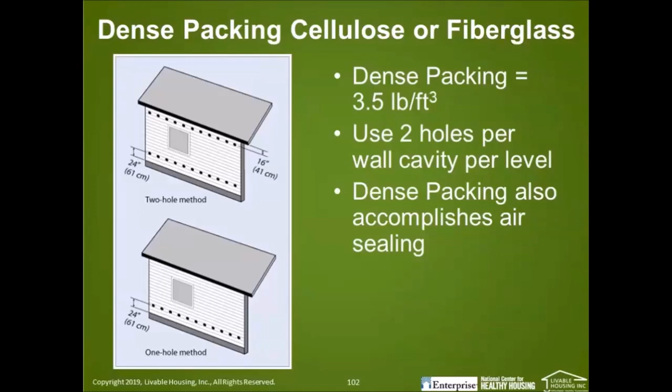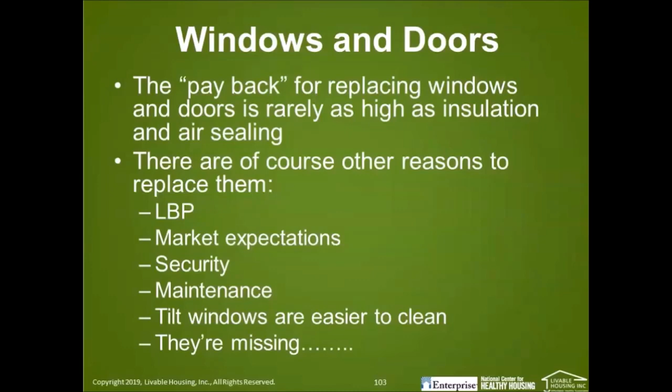Windows and doors, sometimes it's absolutely necessary after a storm to replace them. Think about certainly getting Energy Star certified windows or doors if you're doing replacements. There are reasons to replace them, but the payback for replacing windows and doors from an energy perspective is not as great as you might think. Insulation and air sealing typically has a better return on investment from the dollar perspective. But sometimes if there's lead paint present, or maybe windows are just destroyed, or maybe you want windows that are easier to clean, there may be other reasons why you replace them. In any case, we would suggest considering Energy Star.

Ductwork, I mentioned, replacing ductwork sometimes is necessary. Certainly, sealing the seams on ductwork is considered a very low cost and very effective thing to do. And during the rebuilding phase, if you're replacing ductwork, it's highly recommended now that you seal the seams. In this photo of metal ductwork, you can see even the horizontal seams, and in addition to the seams between pieces of duct, are sealed by a gray mastic. It's like a toothpaste consistency, water-based mastic that you can just spread on with a stiff brush or by hand with a glove on. And it does do a great job of making sure the conditioned air in the ductwork actually goes where it's supposed to go. And even the flexible ducts with vinyl liners and insulation on the outside, the connections between the flexible ducts and the metal boots that you'll often see, those joints should be sealed as well.

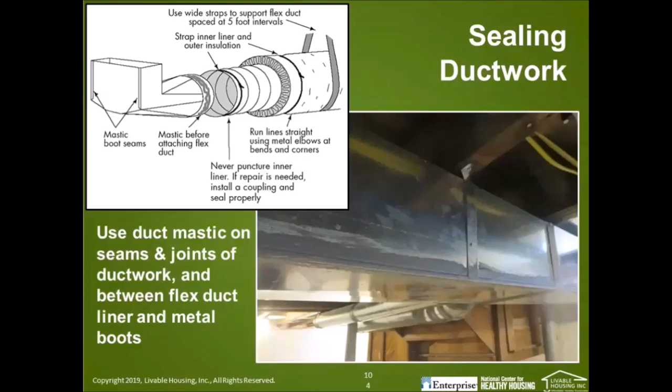We want to keep homes dry, clean and cleanable, safe from tripping hazards, safe from electrical hazards, well lit - which would fit under safe as well - well ventilated, contaminant free, not introducing contaminants, removing contaminants. Keeping homes pest free has great health benefits, and then keeping homes well maintained, which also means perhaps putting in materials that are a bit easier to maintain. And then, of course, thermally controlled, making sure we have comfortable living environments. These are the 8 principles that we would ask you to always think about.

Especially controlling moisture, providing ventilation. We've talked about this a little bit earlier. Bathroom fans, kitchen fans, both of which are vented to the outside, are highly recommended today. Using integrated pest management to control pests is a very important thing to do. Making sure if you're replacing heating, cooling, and air conditioning equipment that you're putting in equipment that's appropriately sized - not oversized, not undersized - and that we're controlling hazards like carbon monoxide, lead paint, radon, using low VOC products, low formaldehyde materials. All of these things contribute to following those 8 principles.

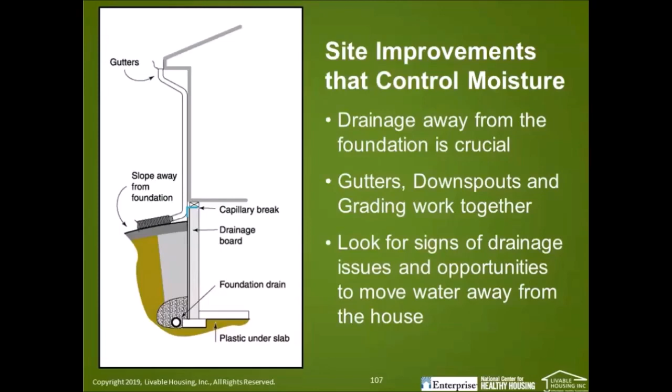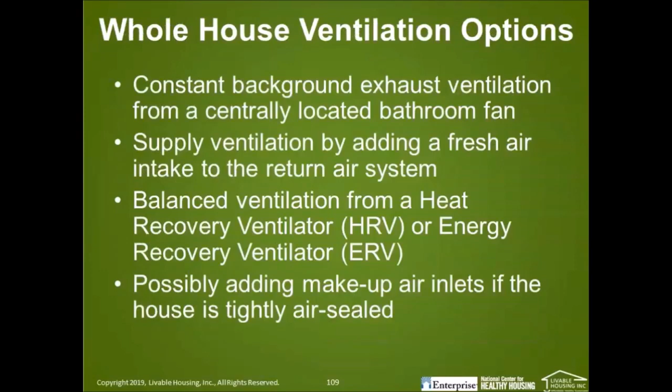Again, using good ventilation practices in bathrooms and kitchens. I'm not going to talk much about whole house ventilation, but in some cases, if you do a great job of insulating, that's something to consider. And an area that we have found lots of health hazards around is improperly vented dryer ducts. Just a reminder, make sure that we vent dryers to the outside and use good quality ductwork.

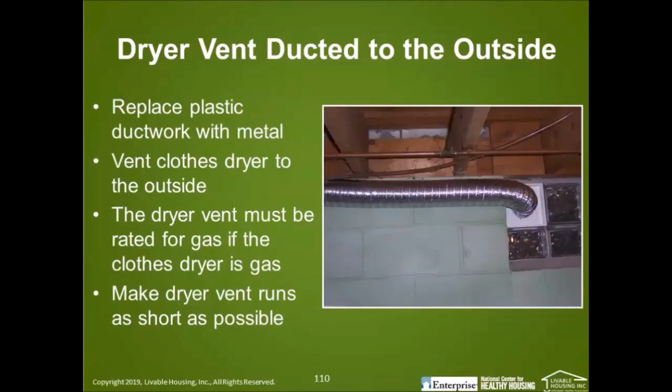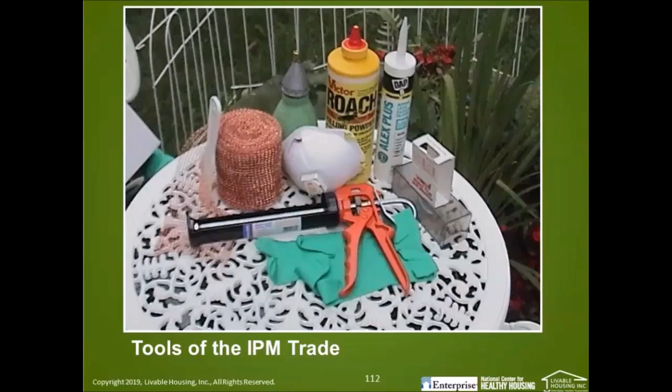Sometimes using copper mesh to fill up bigger holes, followed by caulk or foam, so that rodents can't chew through spaces where the holes are big enough for them to get through. Rodents require very small spaces, and this copper mesh keeps them from crawling through. This stuff is easy to find online, and it's very affordable and does a great job.

So you would use it in gaps before you sealed them up - that's what this is depicting. But sometimes it's just patching walls where there are holes in plaster or drywall, or filling in gaps around masonry between wall coverings. We like to use copper whenever it makes sense because it doesn't corrode and rust over time. In this case, because it's an interior surface and it matches the color of the mortar, steel wool was used.